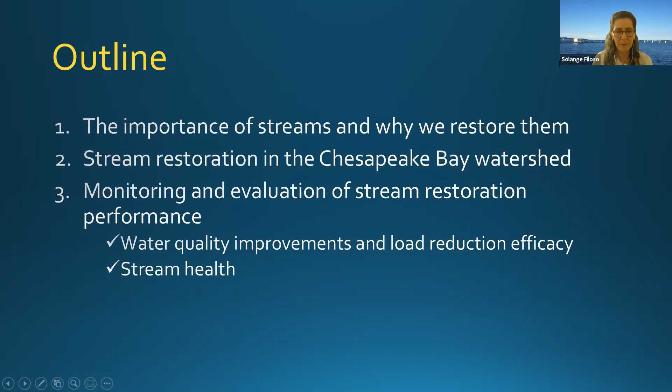And so, talking about monitoring and evaluation, the focus is going to be on water quality improvements and load reduction efficacy, but I'll also touch a little bit on stream health, which is something that I've been getting into in the past year or so. And I have some cool data to show.

So starting with the importance of streams and why we restore them, I'd like to first explain that the target of stream restoration is typically first, second, and third order channels, which form the majority of total stream length in any watershed. And so basically they are the foundation of our watersheds, and just because of that, you can understand how important they are.

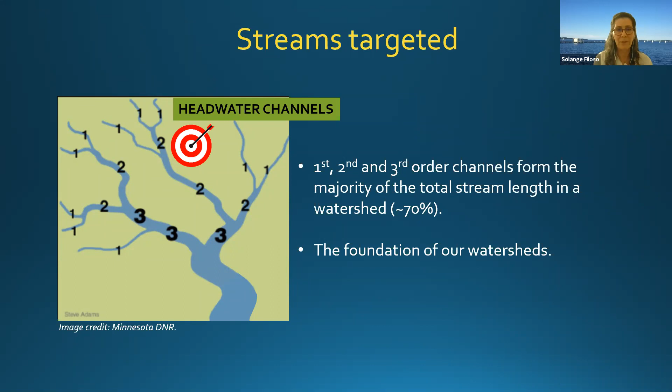So like here in the Bay, even though we have 150 major tributaries pouring water into the Bay every day, we need to remember that a lot of this water is coming from these small channels, or at least passing through the small channels. So they are very important. In addition, they have very important functions. And here is a list of some that are considered really important.

They regulate flow of water from the watershed. So as the water from the watershed moves to the drainage network, it goes through these tiny little channels, and just by sheer friction and resistance, the streams help regulate flow and control flood downstream. These channels also filter runoff, sediment, nutrients, and contaminants before they move further downstream.

The streams also provide fish and wildlife habitat for breeding, feeding, and sheltering. And so overall, they also sustain the health of downstream rivers and bays, like the Chesapeake Bay. So again, they are extremely important.

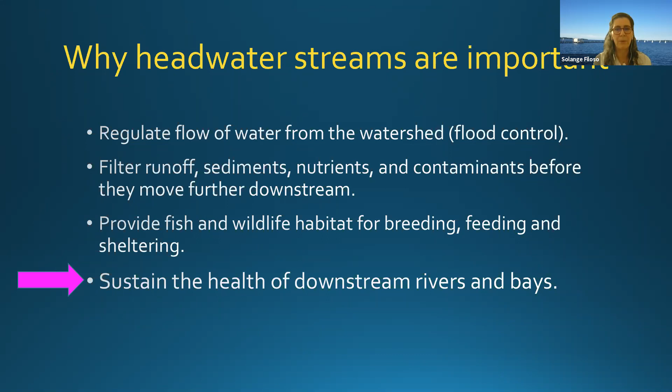At the same time, they are also very sensitive to environmental changes, because they suffer the impact of changes that are happening not only in their drainage area, in the watershed, but also the impact of regional or global change. Like, for example, climate change is known to change the precipitation regime, or cause droughts, and that affects flow of water in these channels and all the other functions that are linked to that.

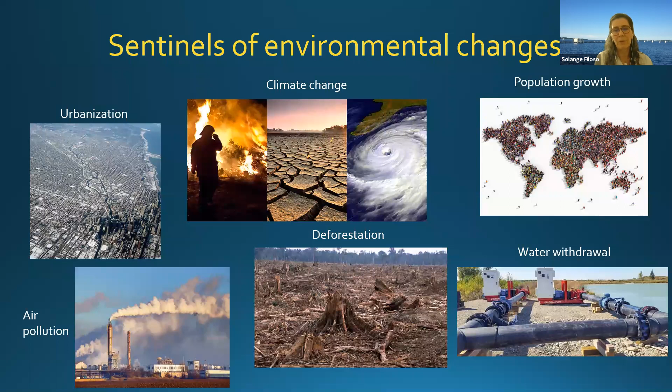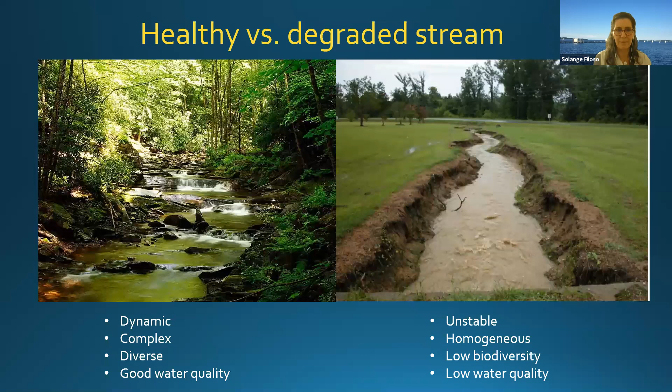And when they are degraded, they basically become a pipe, and an unstable pipe. Typically, the banks erode. They are homogeneous. You can see that you don't have the different habitats for fish and wildlife, low biodiversity, and low water quality. This is a problem, especially with very small streams.

And so, because of widespread degradation all over the world, stream restoration is increasingly being implemented. And so here is just a list of typical goals. The goals are to improve water quality, stream habitat, stabilize banks, control erosion, regulate or mitigate flow regime.

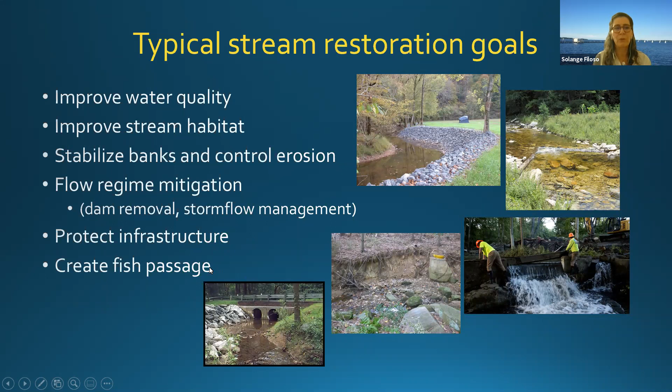There is a lot of restoration that is done for removal of dams, but in urban areas, a lot of restoration is implemented for stormflow management. And sometimes restoration is just done to protect infrastructure like sewage pipes or roads, or to create fish passage.

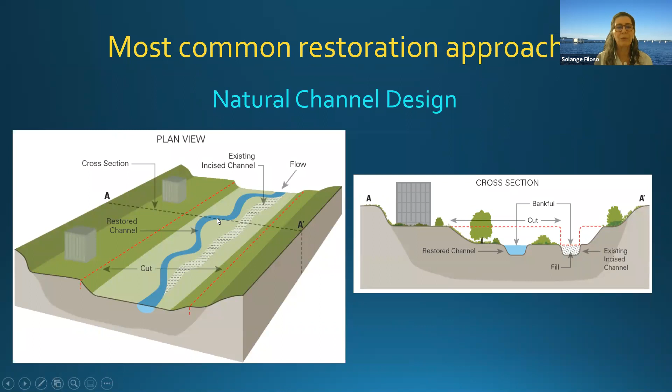And in terms of restoration approach, there is this approach called natural channel design, which is the most common approach used not only here, but all over the US and the world. Natural channel design is an approach where engineers and others attempt to transform a channel that has become a pipe and is degraded, incised and straight, and try to make it look more like a natural channel.

There are also some restorations that include flow deflectors to improve habitat or create habitat diversity, pool riffle complexes also to improve habitat, and/or regrading banks, and there are other things. But in general, this kind of restoration is, as I said, just an attempt to change the stream to make it look more natural.

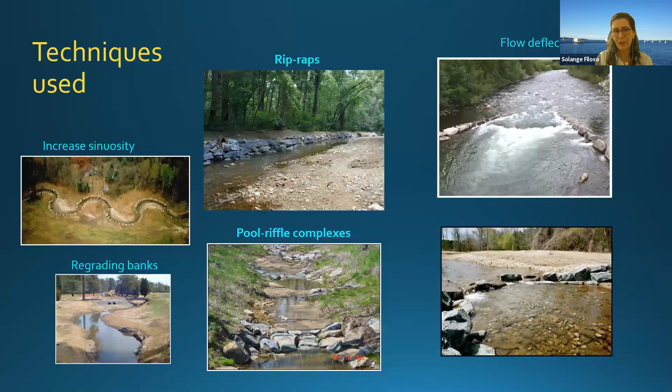But here in the Bay, here is an image that I thought was really cool, showing the export of sediments and nutrients from tributaries to the Bay, probably after a big storm event. Just to highlight the problem that we have of excess nutrients and sediment that have degraded the bay water quality for decades.

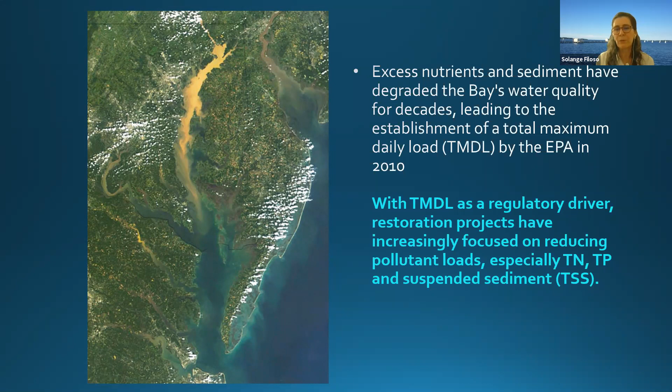And so now with the TMDL as a regulatory driver, a lot of the stream restoration projects implemented here in the Chesapeake Bay are focused on reducing pollutant loads to the bay, especially nitrogen, phosphorus, and suspended sediments. So the main restoration goals in the bay right now are to reduce pollutant loads to downstream waters, usually to meet TMDL goals, and to improve water quality of streams, usually as part of a larger strategy to meet water quality standards for permitting requirements.

But we also have this goal that is clearly stated that we are supposed to improve the health of streams in general across the watershed. And the present goal right now is to improve the health of 900 miles of streams by 2025.

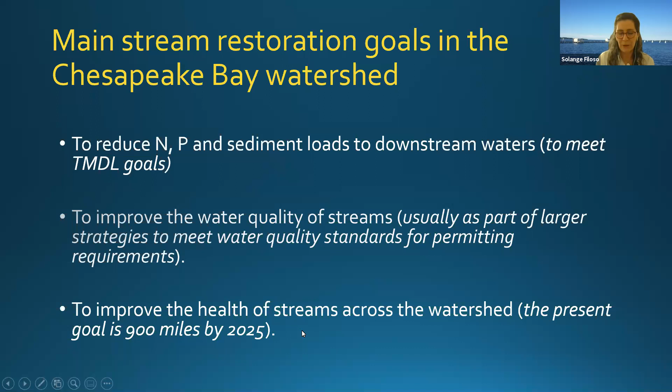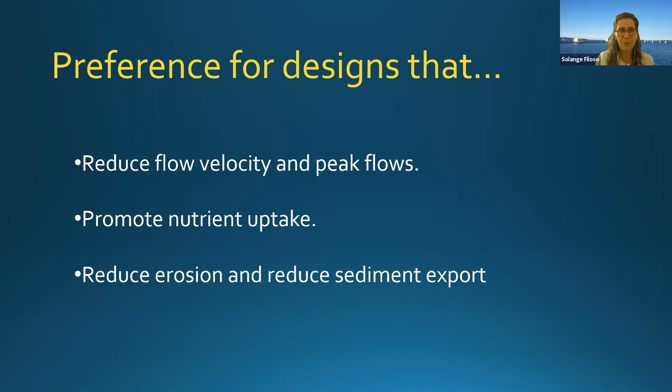However, because water quality is so important, there is a big preference or a bias, which is actually a good thing, for designs that are capable of reducing flow velocity, reducing peak flows, especially in urban areas, promoting nutrient uptake, and reducing erosion and sediment export. And with that, there is a big push to restore stream functions that have been lost,

especially nutrient cycling capacity. As nutrients, especially nitrogen and phosphorus, move downstream, there is a lot of retention and release, which slows down their transport. But when the stream is degraded and turns into a pipe, that nutrient cycling is lost. So the type of restoration that is preferred more and more in the bay watershed is the type that enhances nutrient cycling.

Also one that reestablishes the balance in sediment transport, so the stream is not exporting too much sediment and not retaining too much sediment. And also flow control, especially storm flow control, is an important aspect of restoration.

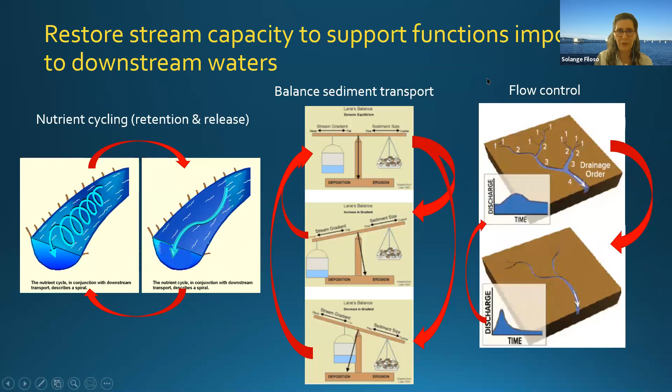And so in terms of design, the natural channel design is still widely used, but more and more a design called regenerative stream conveyance system is used. And that's the kind of system that I have been studying because it is kind of novel.

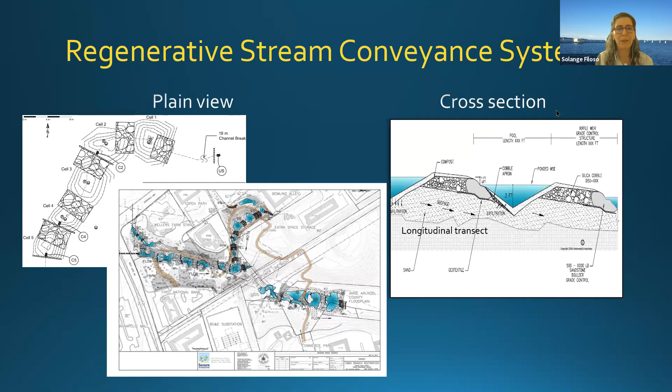The idea of this type of restoration, again, is to enhance nutrient uptake and sediment retention, but we didn't have any information until not too long ago about the performance of this type of restoration. And that's what I've been doing, monitoring these systems for the past few years.

This regenerative stream channel, the conveyance channels, the techniques that they use, if they are implemented in lowland channels or channels that have gentle relief, usually include floodplain reconnection, creation of wetlands, and to create stream wetland complexes, again, with the hope or the idea that these wetlands or floodplains will enhance nutrient uptake and also retention of sediment.

In some cases, these restorations include side storm flow ponds and/or braided or side channels. Again, the idea is to increase the water residence time and also the flow path of water in the channel, to create more and more opportunity for uptake of nutrients and retention of sediment. And so here are some pictures of these RSCs, we call them, in lowland channels.

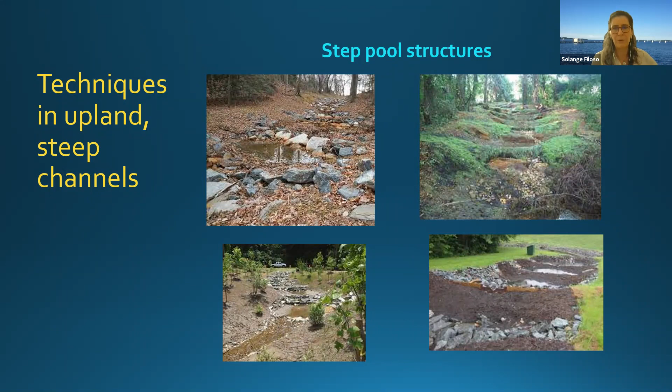And so now I'll go into the monitoring and evaluation of restoration. This was just an introduction of the kind of systems that are out there. As I said, I have been monitoring and evaluating the performance of these stream restoration projects for over a decade, and what I'm going to show you today is a synthesis of a lot of work that I have been doing. It looks like not a lot of data, but there is a lot of data in it. So how do I determine restoration success regarding improvement of water quality and reduction of pollutant loads?

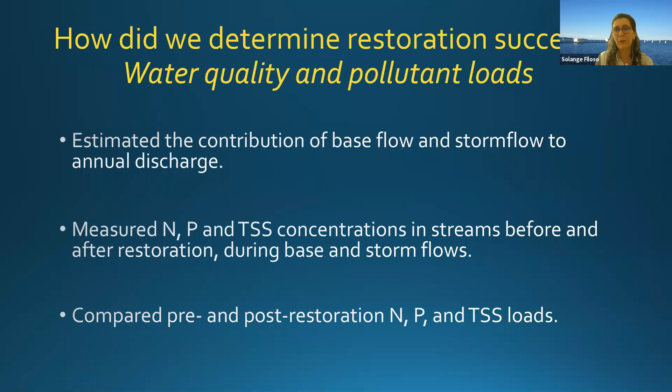And if there is a difference, it means that the restoration was a success in terms of reducing pollutant loads moving downstream. And here's a list of channels that I have monitored in these past years.

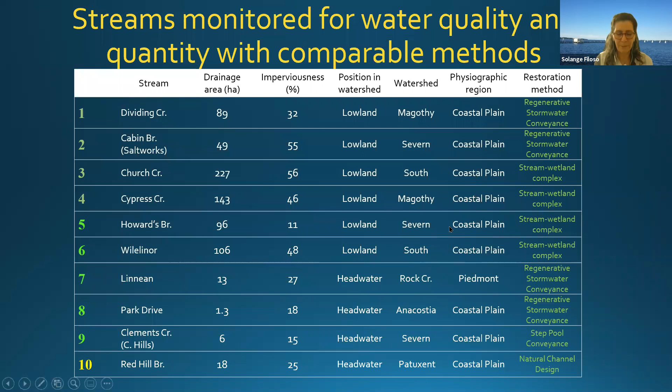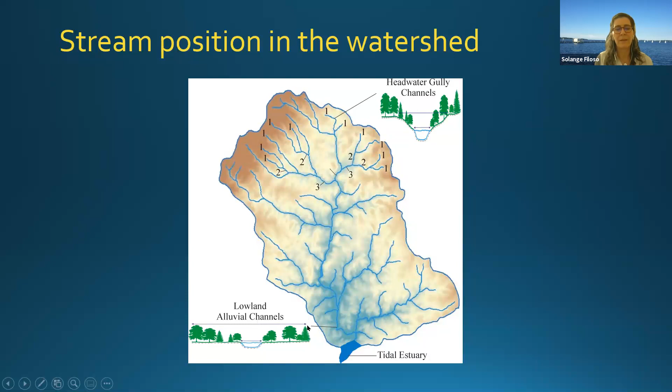So here is just a drawing to illustrate what I mean about streams that are up in the watershed or low in the watershed. So most of the channels that are high in the watershed are headwater gully channels. And then in the bottom of the watershed, they are lowland alluvial channels.

And in terms of how the monitoring is done, for water quality, I collected water samples in these channels during normal flow conditions, or base flow, and during storm flow conditions. So during base flow, we would go every 2 weeks and collect samples manually and then filter and analyze them in the lab.

But for storm flow, it was a little bit more complicated because we collected samples along entire hydrographs, meaning from the beginning of a storm when the water level is still normal, and continued to collect water samples as the water level goes up and then goes down, to have an idea of how concentrations change during this entire time, and to then calculate loads properly.

And so this type of storm flow sample collection was done throughout the year. And every time that storm flow samples were collected, we generated about 24 samples or more. And we collected several storms per season, in pre-restored, restored and control sites. So you can just imagine the number of samples generated for analysis each time that we went out sampling.

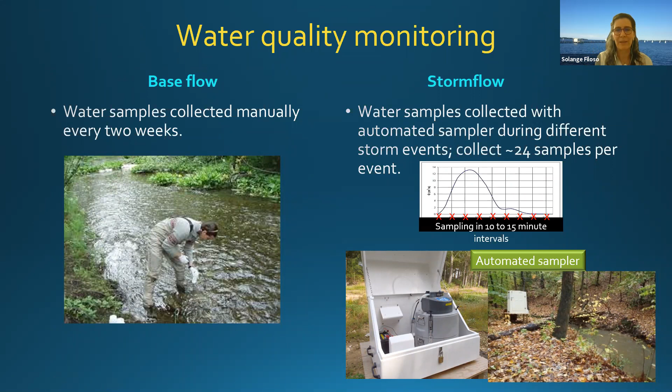For water quantity, the monitoring included measuring how much rain fell into each catchment that had the stream to be restored or that was restored. And in the channel, we measured instant flow manually with some methods provided by the USGS, but we also used structures like flumes and weirs to have better measurements.

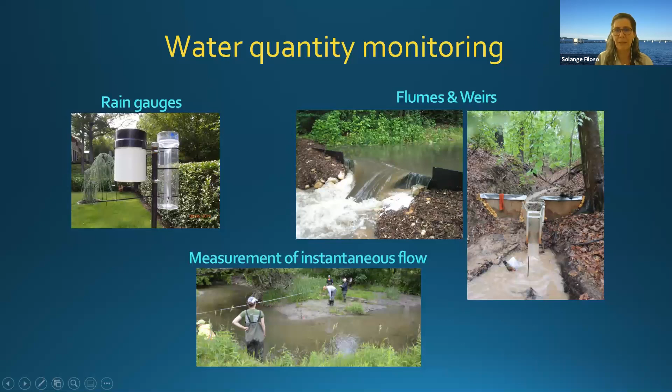And so now I'm going to start showing some data, so you have an idea of what we have learned so far. So first of all, out of these 10 channels that I am summarizing the data for, what we have learned in the past decade is that the majority of the annual discharge of these channels is from storm flow.

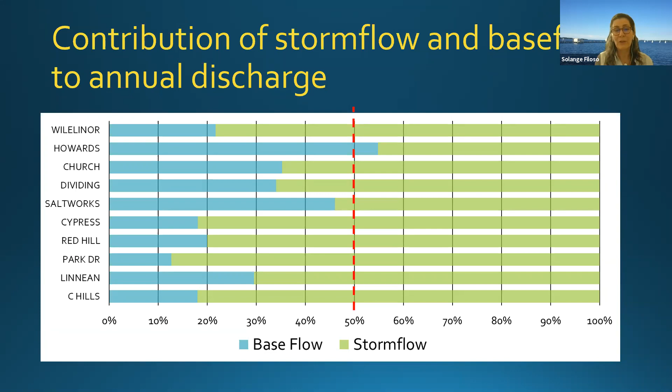So storm flow contributes way over 50%, except for one channel here, of the annual discharge. So it's very important. It means that if the stream restoration helps improve the water quality during storm flow, that's a good sign. But base flow is when there is a lot of biological activity, so that's also important.

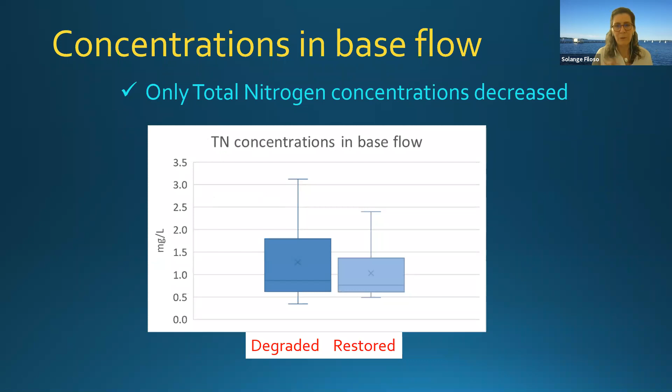Concentrations for phosphorus and sediment actually either didn't decrease or increased with restoration. So restoration did not help improve water quality during normal flow conditions, except for some reduction in total nitrogen concentration. Okay, and I'll show what this means later.

During storm flow, during or after a rain, concentrations for nitrogen, phosphorus, and total suspended solids decreased in the restored stream. So we saw a substantial decrease in concentrations, especially for total suspended solids. So restoration was highly effective at improving water quality during storm flow conditions, not so much for base flow conditions.

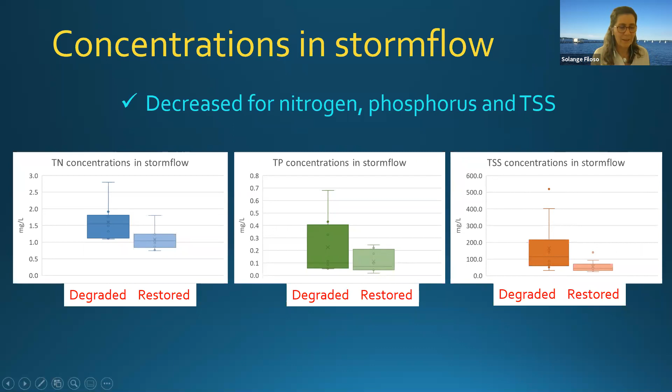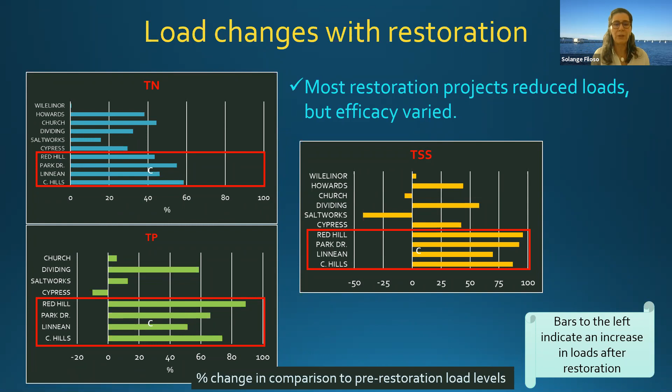What is interesting is that the ones that performed well were all first order upland channels at the very top of the watershed that had those step pool restorations, except for one with a different type of restoration. So the position of the restored stream in the watershed seemed to be relevant to performance.

Another potential factor seems to be limiting restoration performance. We're interested in helping regulators or watershed managers decide what kind of restoration they should invest in, and have some easy indicators for them. We saw a decrease in the performance. This again is percent change, meaning how much load reduction there was in the restored stream.

These points are all different streams, and how much reduction there was in relation to the level of imperviousness in the watershed. The more impervious the watershed or catchment area was for the streams, the lower the performance, or the less pollutant reduction there was. In fact, in some cases there was actually an increase in pollutant loads.

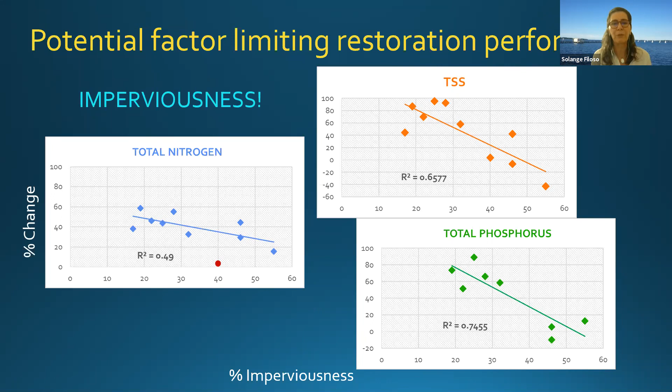So imperviousness is a very easy indicator, and it's interesting because there are also some studies from UMCES with macroinvertebrates that show that imperviousness also impairs the recovery, the biological uplift of macroinvertebrates in streams coming back after restoration.

So restoration is not improving water quality all the time, but because it is improving water quality during storm flow conditions, these streams are performing well. They are actually effective at reducing loads to the bay. So restoration success is high. There are some that don't do as well. There is variability, but there is success too.

But then there is the question about stream health. Aren't we supposed to improve stream health? This is something I have been wanting to look at for a long time. Unfortunately, all the funding available until not too long ago was just to look at water quality and load reduction. But I was always curious about stream health. So in the past year or so, I have started using indicators of stream health to look at whether restoration is also helping the stream. So not only the bay, but the streams.

This is a project I have done in collaboration with a colleague here from CBL, Ryan Woodland. The indicators we used included dissolved oxygen concentration, which is an indicator of the ability of the system to support aquatic life. We also looked into stream metabolism, which is a very general but very good and highly used indicator of stream health. It's a metric that helps explain how much biotic activity there is in a stream.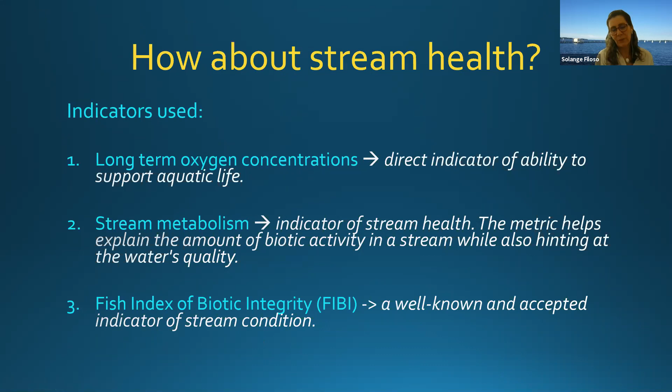And then another indicator was the fish index of biotic integrity, which is a well-known and accepted indicator of stream condition. So the question is, are fish populations coming back with restoration? Is the diversity of the fish community better? And so this is what this indicator can help with.

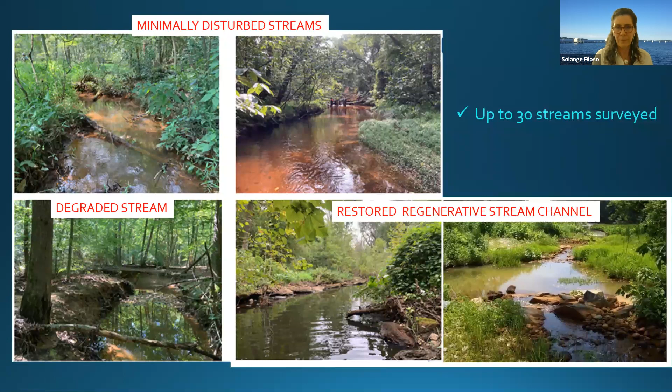And the streams that we monitor for that, we surveyed up to 30 streams, and here is what they look like. We surveyed minimally disturbed streams that were single channel or were connected to the floodplain or had wetlands. We also surveyed degraded streams, and then the restored streams that have been restored with the regenerative stream channel design.

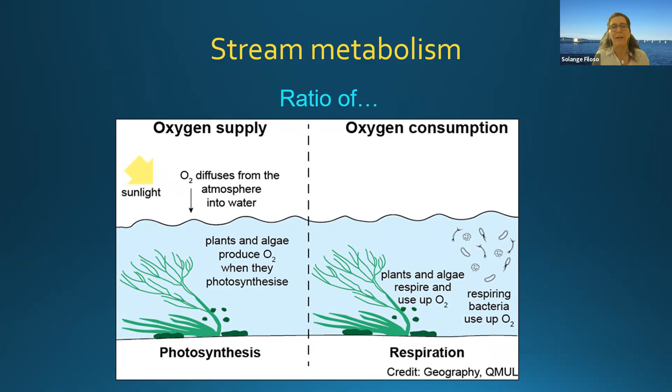In terms of stream metabolism, again, metabolism is just a way to look at how the system is doing in terms of how much it's producing versus respiring. I'm still putting together data, so I don't have yet the data for the control sites or the reference sites. But so far, what we have seen is that the primary production in these streams was lower than respiration.

So respiration is greater than production in these restored streams, meaning that the ecosystem is using more energy than it's creating. And when the primary productivity is lower than respiration, it's an indication of water pollution. So we may be restoring the streams and trying to enhance nutrient uptake, but the truth is that we are not reducing the amount of nutrients coming into the stream, so the water is still highly polluted or full of nutrients, and this may be a problem.

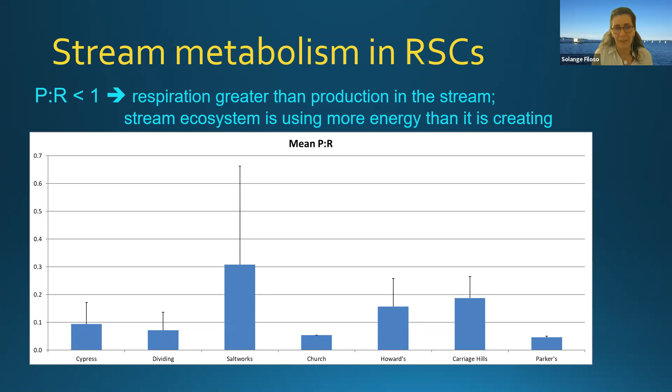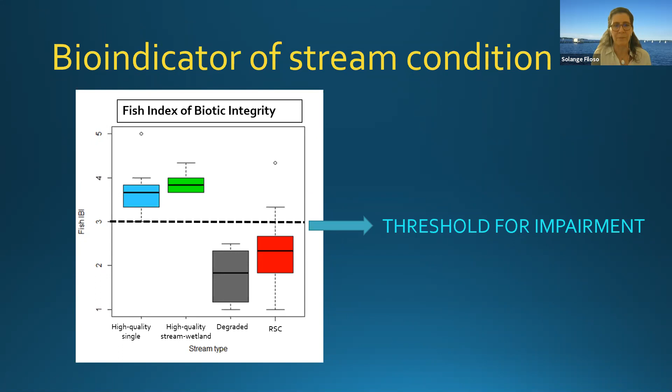But basically what this shows is that the restored stream is still below the threshold for impairment. So we haven't seen much improvement in terms of fish diversity and other important indicators. This is a concern, but maybe it's just a matter of time. Maybe it will take decades for the systems to go back to a more normal level, or maybe it is a matter of really eliminating or reducing the source of stress to the systems, like too much nutrients coming in, or too much surface runoff or whatever.

But in conclusion, going back to the question that we started with, is stream restoration helping our streams and the bay? So my answer is that stream restoration is helping the bay, but not necessarily the streams. It's helping, but we also have to be careful, because we need way more restoration to really have an impact at the scale of the bay. But having a little bit is better than nothing.

Another conclusion is that we need to pay more attention to where we restore streams. We saw that streams performed much better if they were restored at the top of the watershed, so upland streams. And we also need to pay more attention to trade-offs. So maybe we're enhancing nutrient uptake, but at the cost of reducing oxygen levels in the streams, and then causing some harm to organisms like fish and macroinvertebrates.

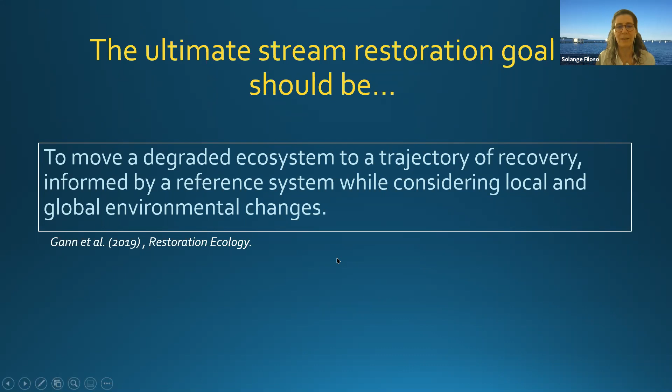Thank you, Solange. I think you'll be surprised by the specificity of some of the questions you're about to get. So I'll start with a very general one, from Jim Hurley. He says, who is responsible for stream restoration? Is it a local activity, a state, or some agency in between? Very good question.

So it varies. A lot of restoration is done by nonprofit organizations or by river keepers, communities, but more and more by government, state and municipalities, especially because of the TMDLs. Because after 2015, stream restoration started being considered one of the practices that can be used to reduce nitrogen, phosphorus, and sediment loads to the bay. And so I think that a lot of governments end up using stream restoration as a way to address the problem, hoping that they don't have to do anything else in the watershed.